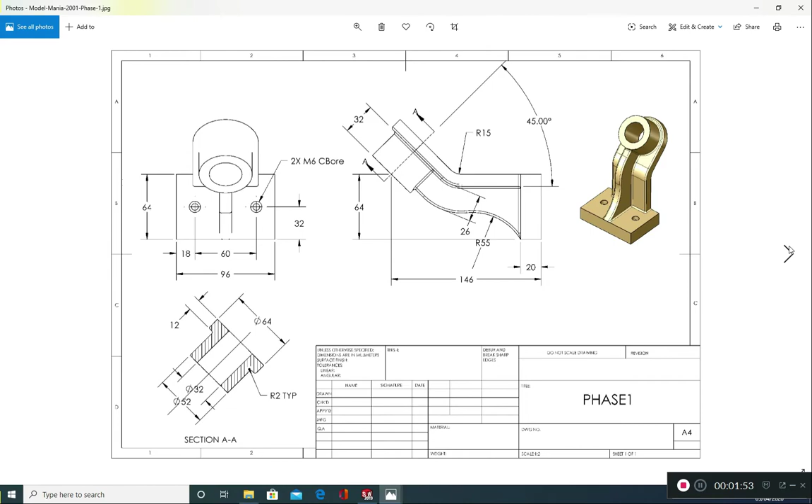I've also noticed that this value has changed in Phase 2. This is now 45, where in the original it was 64. I think that's it. Just to check those counterbore holes - yeah, they're still M6, so that's it.

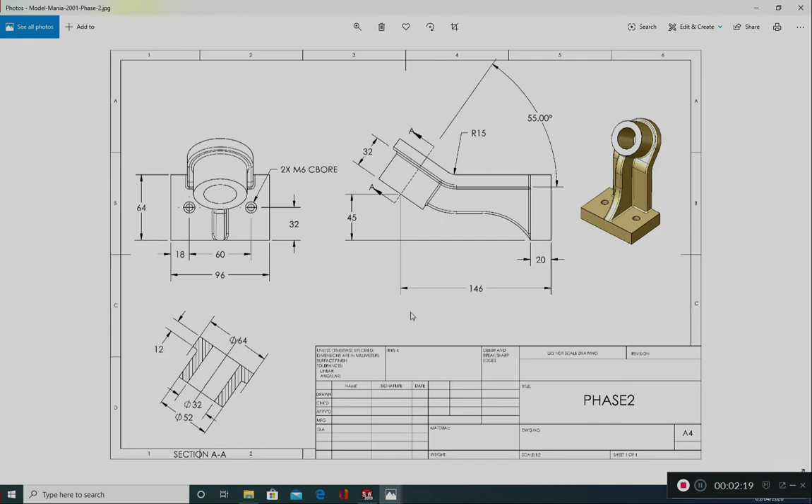There's two changes to be made here: 55 degrees and 45. What we might see happen is when we increase the angle from 45 to 55, and decrease this length to 45, that might have an impact on the R2 fillets we've got. We might have to go into that and redo the fillets, but we'll have a look and see what happens.

So I'm in SolidWorks and I've got my Phase 1 model complete. If you remember back, I highlighted the fillets so they were easily identifiable, by going in and editing the appearance to red.

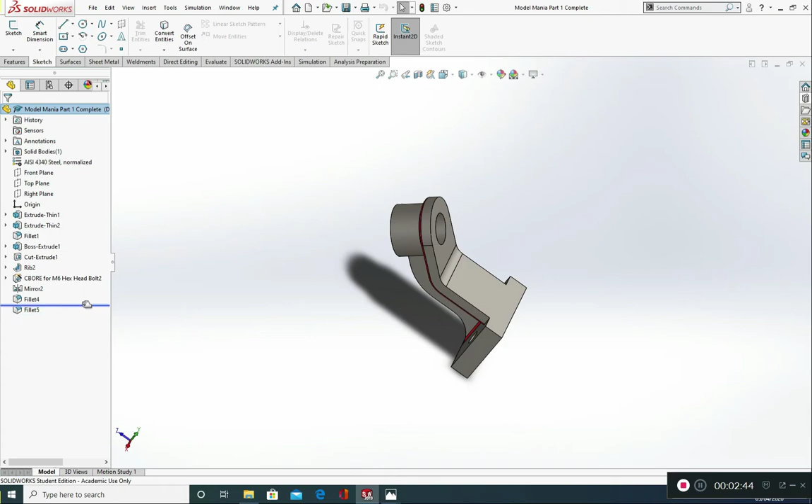The way we're going to do this is using this rollback bar. As we click on it and drag up, it's basically a history of what we've done. If I drag just past the fillets, you can see they disappear completely. If I drag back over the fillets, they all go back on - it's almost a history of what we've completed so far.

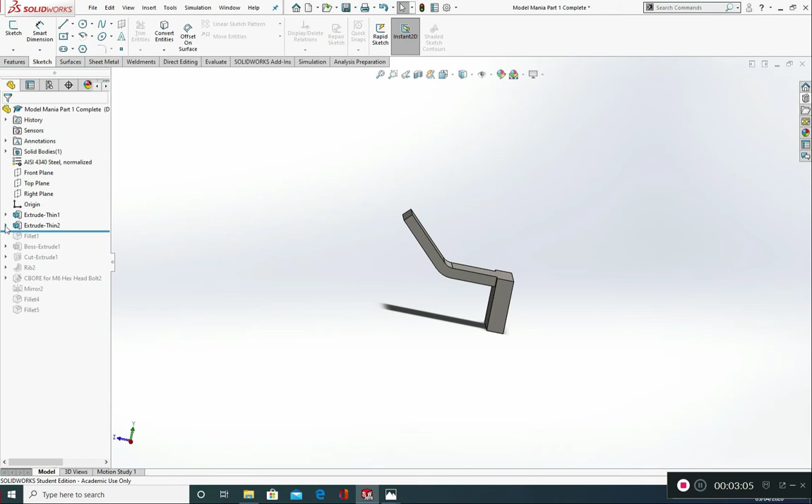I'm going to drag right up to here, go normal to that sketch, and edit this sketch. This angle needs to be 55, and this value - let's just check, I think it was 45. Phase 2, 45, yep. Let's update this, double click, change to 45, and green tick.

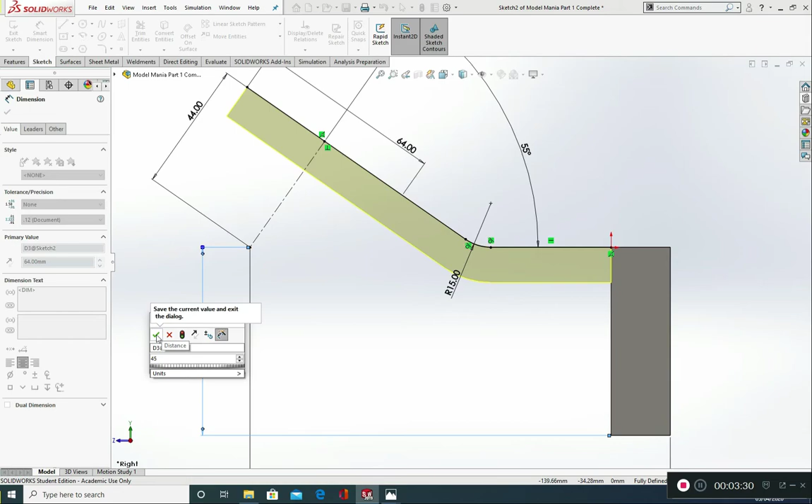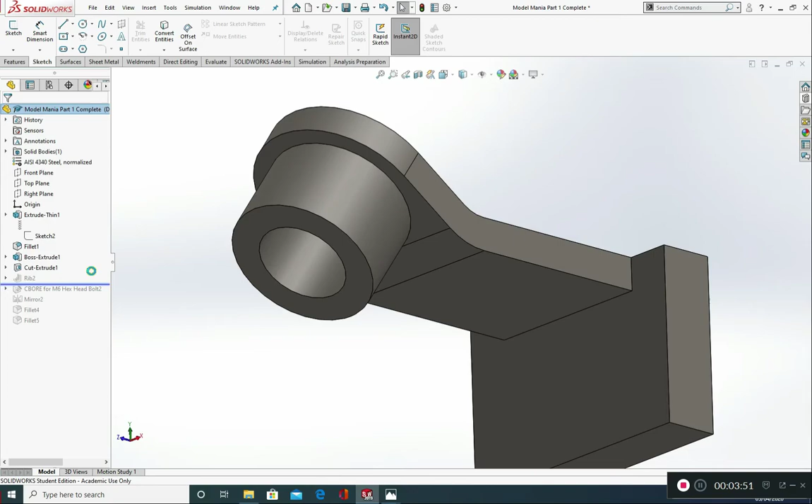Let's exit the sketch, and use the rollback bar now. If we just roll it back, we've got our full round fillet on there. Our boss extrude comes out, followed by our cut extrude, no problems so far. The rib matches the profile we did in the first bit.

The counterbore holes, M6. There's the first one - remember, we mirrored that to speed the process up. There's 2. Now this is where I think there might be a problem. We'll have a look. Okay, we've got an error here.

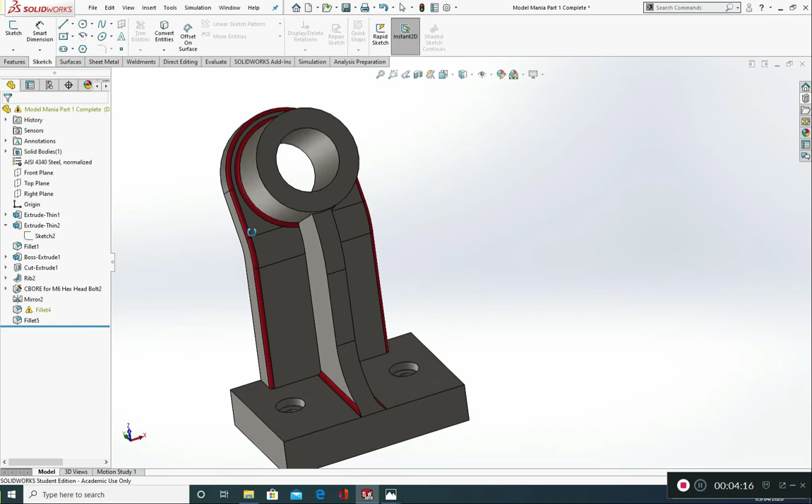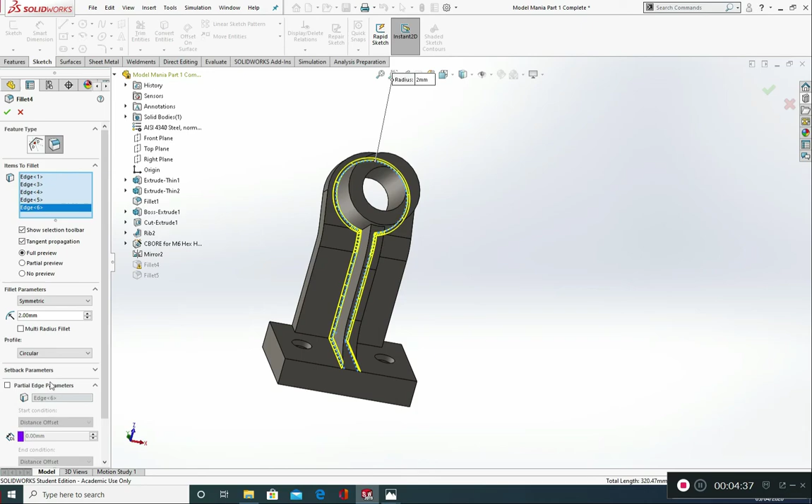I'm going to drag down to the next one - this one looks alright. This one looks problematic - it's picked up this part all the way around, but it's missing this part. So I'm going to edit this fillet, and it's saying it's missing edge 2, so let's just delete that. Let's see if we can pick that up now. There we go - we've picked up that new edge at 2mm, green tick.

And then we'll see now on our left hand side, in the feature manager, no problems at all with any of the features that we've created. So that was it really for Phase 2.